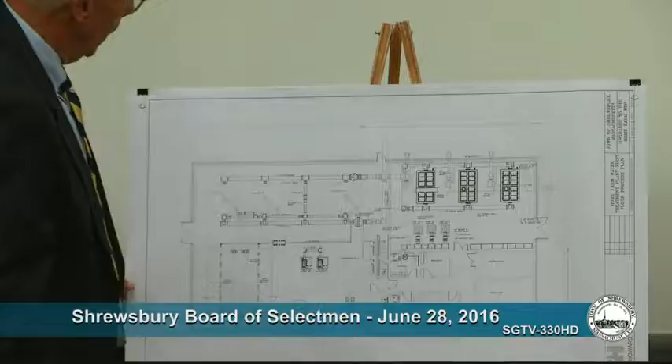So we've added that clear well, and as you can see, the footprint of the plant has expanded quite substantially. Under this whole section of the building now is that baffled clear well that will give us that 4-log removal. Basically, as you look at this plan, water is pumped into the pressure filters that we discussed at our last meeting.

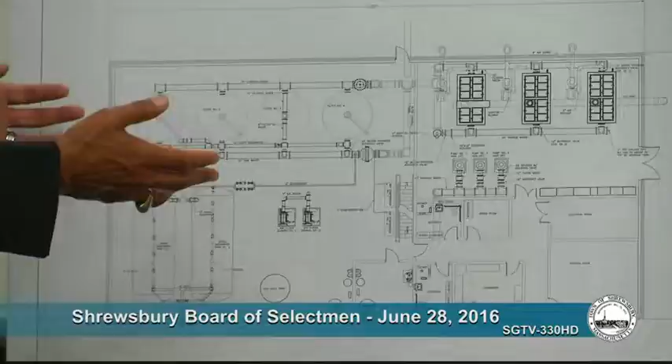Previously we had those existing 2 pack tower aerators, and we were going to utilize those aerators for pre-treatment. But what happened when we got further into the design, the IDI - who was here with us last time, and manufactures the filters - thought that the pack tower aerators were adding too much dissolved oxygen into the system.

Whereby we were going to have to bypass some of the strippers to blend the water, and it just didn't make sense that we're trying to treat that water for VOC removal, that we would bypass part of it. It would make Bob's operation of the facility much, much harder to do.

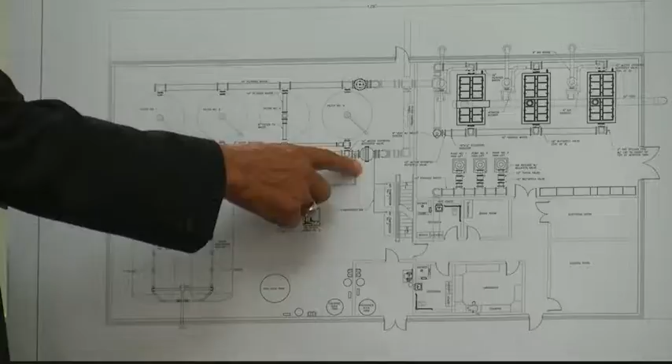So in all of their existing plants, they inject dissolved oxygen right into the header pipe. So that's what we're doing. It's very easy to control the process that way.

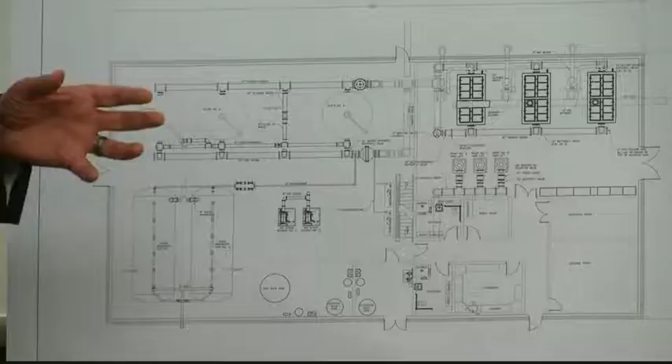So what we looked at was doing that and then still incorporating the pack tower aerators, where we'd have to pipe it back out through the aerators, then pipe it back into the clear well. And we looked at the cost of incorporating and upgrading what we had to do to the existing facility and the aerators - it was actually $500,000 more expensive for us to incorporate those existing pack tower aerators into this design.

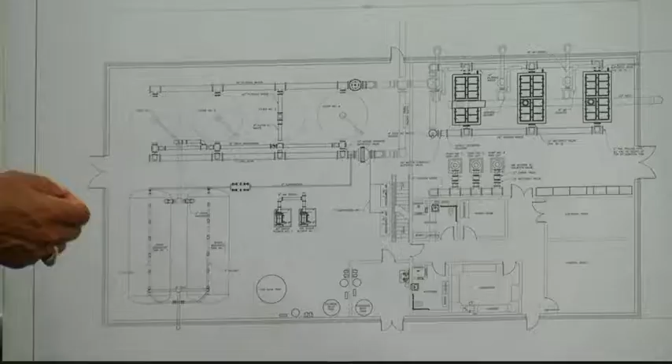So we went with 3 deep bubble aerators, so water will flow through the filters into the deep bubble aerators, which will perform the same function that the pack tower aerators do today. So it'll raise the pH and drive off any volatile organics.

The water is then discharged into this baffled clear well, and then pumped with vertical turbine pumps sitting over that clear well that will pump the water directly into the system, and then it will be injected with the chemicals that are required: chlorine, fluoride, and...

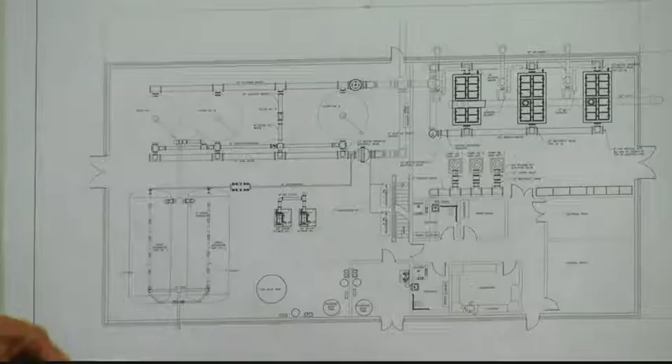KOH, if we needed to have a finished water pH, but we feel the pre-chemical that we're using, along with the deep bubble aerator, means there won't be a need to add KOH to the effluent of the water. But we'll have the ability to do it, though it probably won't be required.

People - state officials have lost their jobs, EPA officials have lost their jobs, local people are getting prosecuted. So, you know, corrosion control is a very serious issue.

We feel a lot of our clients meet the lead and copper rule without adding a phosphate. The reason you couldn't do that previously is because of the iron and manganese in the water. The pH you'd have to raise would oxidize the iron and manganese, causing it to fall out. So for you to meet lead and copper with pH adjustment only would give you discolored water throughout your system. The way around that was to adjust to a lower pH and then add a phosphate to the system, which would coat the piping and give you corrosion control.

But if we remove the iron and manganese so they can't precipitate, taking them out of the system with our new treatment facility, that allows us to put a higher pH into the system. We would pilot that to make sure it works and that we can meet lead and copper requirements, so the facility will be designed with a phosphate, but with the intention that the phosphate would be eliminated over time as we show we can meet lead and copper without it.